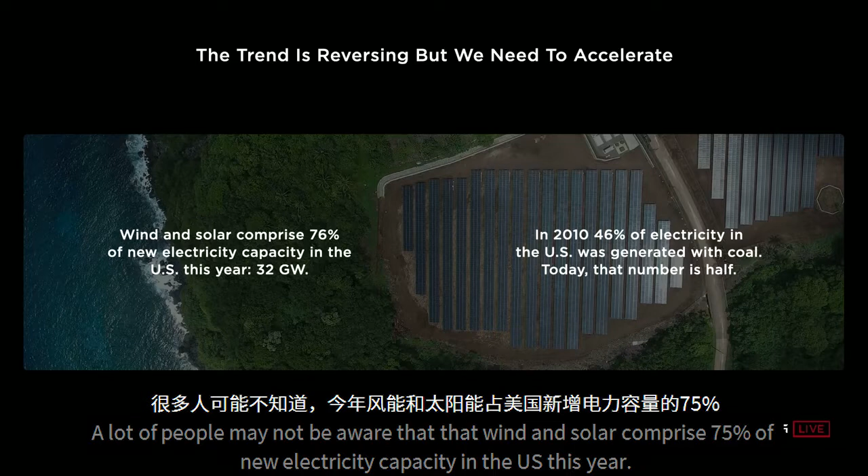There is a lot of good news, though. A lot of people may not be aware that wind and solar comprise 76% of new electricity capacity in the U.S. this year. So this is a really major thing. The grid is going sustainable very, very quickly.

It's also worth noting that the length of time that power plants last is on the order of 25 years, so even if 100% of energy generation was sustainable, it would still take 25 years to convert the grid. And in the past 10 years, power production from coal has dropped in half, from 46% of electricity in 2010 to 23% in 2020. So this is a massive improvement.

So good things are happening on a lot of levels. We just need to go faster.

In terms of Tesla's contribution, we've delivered over 1 million electric vehicles, 26 billion electric miles driven, and many gigawatt hours of stationary batteries, 17 terawatt hours of solar generated. I think solar is sometimes underweighted at Tesla, but it is a massive part of our future.

The three parts of a sustainable energy future are sustainable energy generation, storage, and electric vehicles. We intend to play a significant role in all three. So to accelerate the transition to sustainable energy, we must produce more EVs that need to be affordable, and a lot more energy storage, while building factories faster and with far less investment.

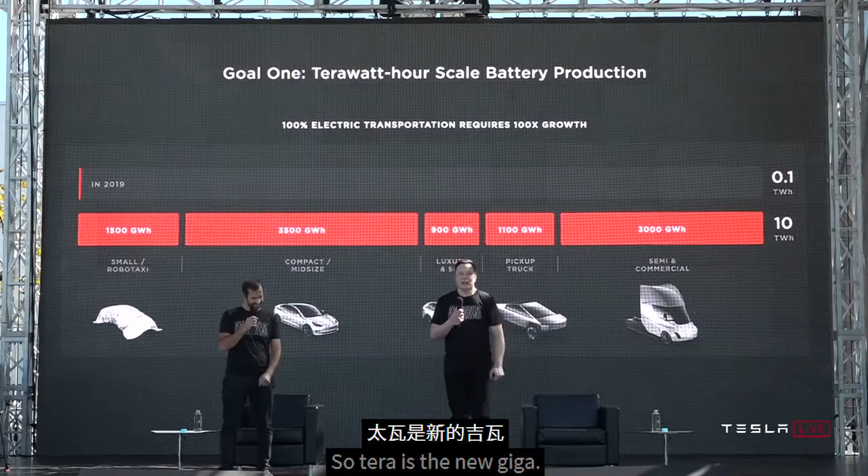So goal number one is a terawatt-hour scale battery production. Tera is the new giga, and a terawatt is 1,000 times more than a gigawatt. We used to talk in terms of gigawatts; in the future, we'll be talking in terms of terawatt hours. This is what's needed in order to transition the world to sustainability.

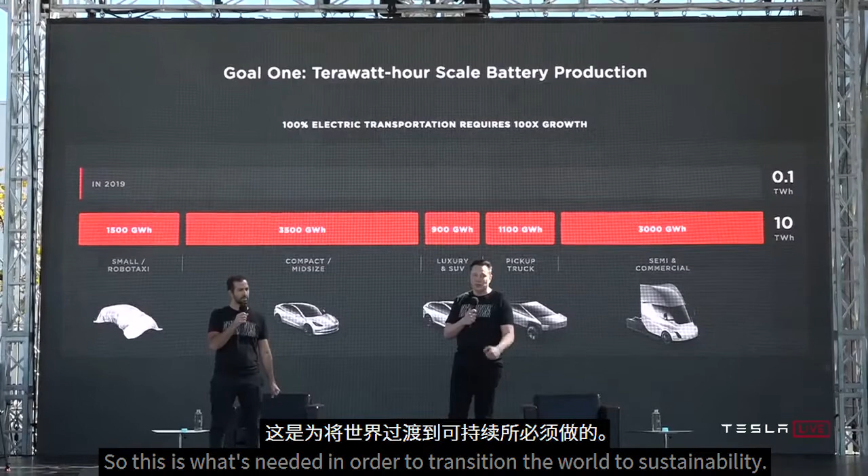You can see we're talking about 100x growth in batteries for electric vehicles to achieve this mission. And we are going to get there. It's just a matter of how fast, and our intention is to accelerate it.

You basically need on the order of roughly 10 terawatt hours a year of battery production to transition the global fleet of vehicles to electric. The average vehicle lasts 15 years, so we're talking about 150 terawatt hours, give or take, to transition all vehicles of all types to electric. So it's a lot of batteries, basically.

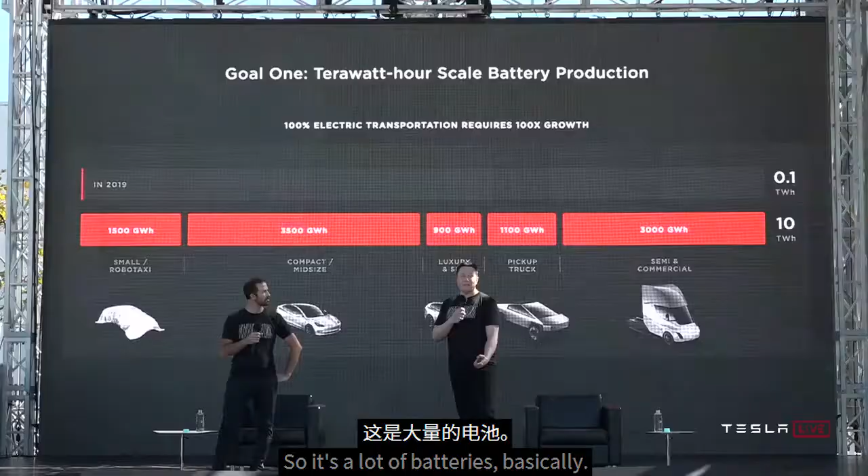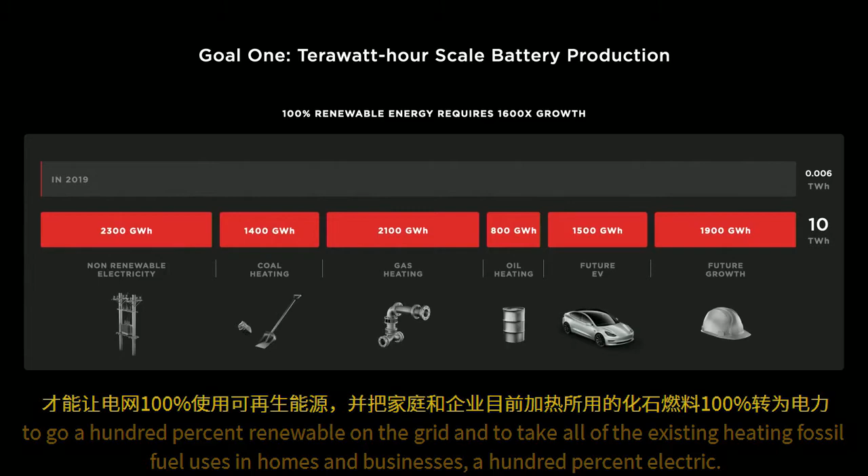And then on the grid side, we have a similar mountain to climb: 1,600 times growth from today's grid batteries to go 100% renewable on the grid and to take all of the existing heating fossil fuel uses in homes and businesses 100% electric.

And this number, I think, might grow even more, as the world economy matures and as countries with high populations industrialize, we could see this number be even more. But let's say it's roughly 20 to 25 terawatt hours per year, sustained for 15 to 25 years, to transition the world to renewable. This is a lot.

So today's batteries cannot scale fast enough. They're just too small. For Giga Nevada, 150 gigawatt hours per year is probably what we expect to make out of there, but this is really pretty small in the grand scheme of things. That's only 0.15 terawatt hours.

And it costs too much. We would need 135 fully built out Nevada gigafactories to achieve 20 terawatt hours a year. It's not scalable enough of a solution. We need a dramatic rethink of the cell manufacturing system to scale as fast as we can and should.

I think we should view this as more than just a question of money. Money is sort of like an ethereal thing, but it's really the amount of effort. You have a certain amount of effort, in terms of people and machines, and depending on how efficient that effort is, for a given amount of effort, you want the most amount of batteries. It's not just a question of like, well, if we had $2 trillion, tomorrow you could make this. It's not that easy. You actually need to organize a massive number of people, build a lot of machines, build the machines that make the machines. So it's incredibly important to have that effort yield the most number of batteries.

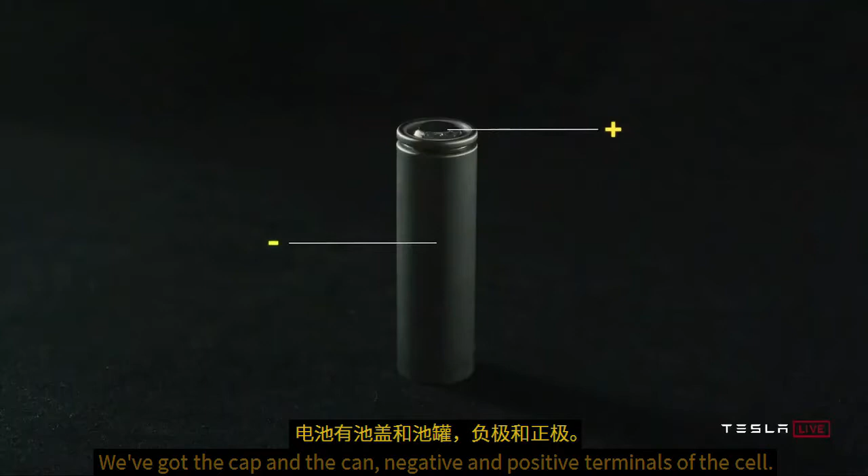We've got the cap and the can, negative and positive terminals of the cell. When you open that cell, you've got a tab connected to those terminals, what we call the jelly roll, which is the wound electrodes on the inside. You can actually see what this looks like as you unwind it. This is over 1 meter long in a typical 2170 cell. So it's quite a long winding process. And you can see the tab still there.

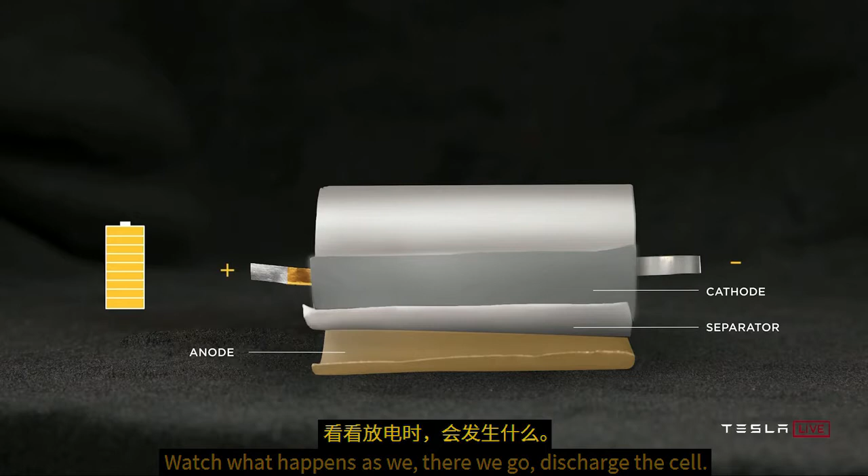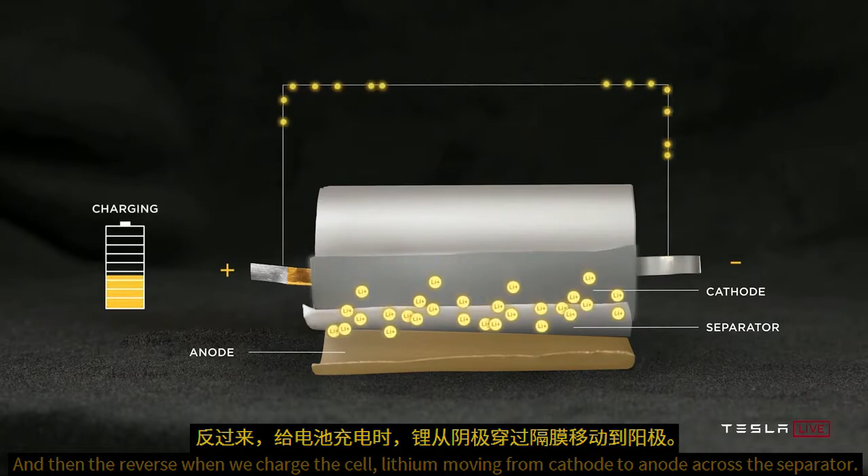And to explain what's actually going on here, we've identified we've got anode, cathode, separator, positive and negative terminal. Watch what happens as we discharge the cell: lithium moving from anode to cathode, and then the reverse. When we charge the cell, lithium moves from cathode to anode across the separator. This is the basics of what makes all lithium-ion batteries, no matter what the form factor is.

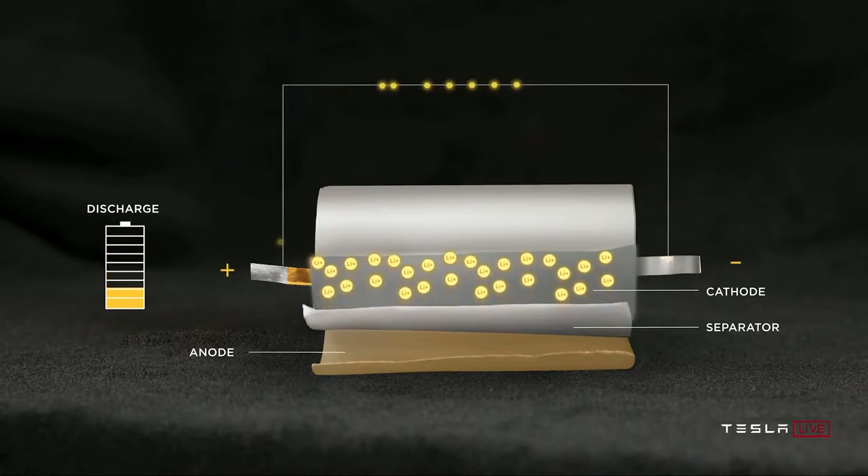And when we look at what's happened to date, at least in our products, we've moved from the 18650 form factor to the 2170 form factor through great collaboration with our partners, Panasonic, new partners like LG and CATL, and probably others in the future.

A slight note on why it's called the 18650, although not on the slide, versus the 2170: the first two digits refer to the diameter, and the second two digits refer to the length. That helps explain why these numbers seem weird. What's up with these weird numbers? But nobody could explain to me why there was an extra zero. So, okay, well, we're deleting the zero that nobody can explain in future form factors.

So technically it's like the 18650, but going forward it's the 2170, because we just got rid of the extra zero since it's pointless. This was an evolutionary step, going from 1865 to 2170, bringing 50% more energy into the cell.

But when we look to the ideal cell design, if we were to do it ourselves, we need to go beyond just what's in front of us and study the full spectrum of options. So we swept the key figures of merit, how much we can reduce cost and how much vehicle range increases as we change the outer diameter of the cell. We found a sweet spot somewhere around 46 millimeters.

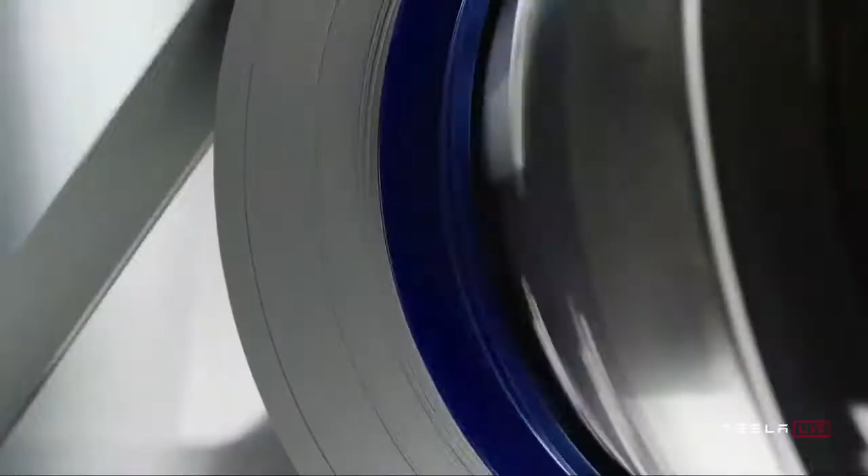It's a video of some of what's going on in the plant.

It will take about a year to reach the 10 gigawatt hour capacity. This is important to appreciate: when you build a factory, there's a certain capacity you design to, and then it takes some period of time to actually achieve that capacity. So I'd say it's probably about a year before we get to the 10 gigawatt hour annualized rate with the pilot plant, and this is just a pilot plant. The actual production plants will be more on the order of maybe 200 gigawatt hours, maybe more over time.

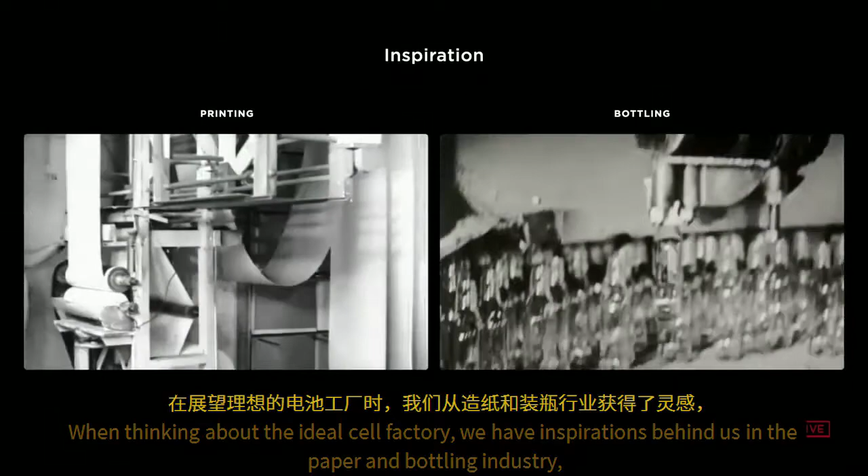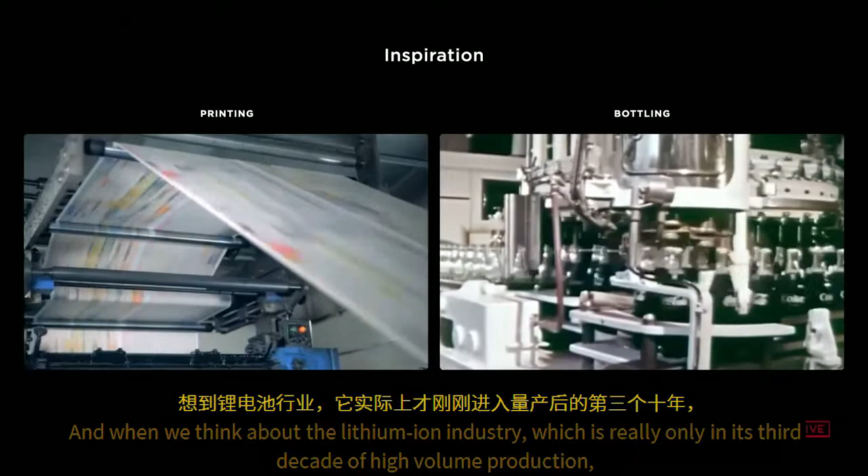When thinking about the ideal cell factory, we have inspirations from the paper and bottling industry, where from humble beginnings, over a century of innovation has enabled mass scale, continuous motion, unbelievably low manufacturing cost. And when we think about the lithium-ion industry, which is really only in its third decade of high-volume production, it has so far to go to achieve similar scale and simplicity. That was the inspiration we set out to the team as we thought about how to marry cell design and manufacturing in the best possible factory.

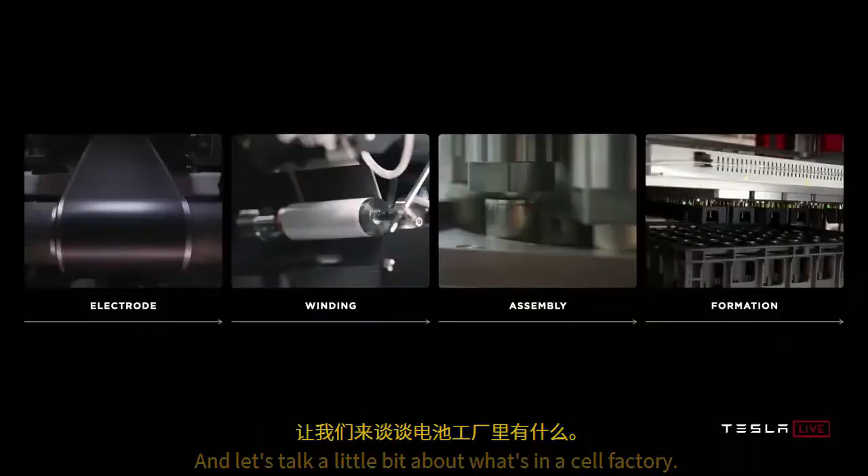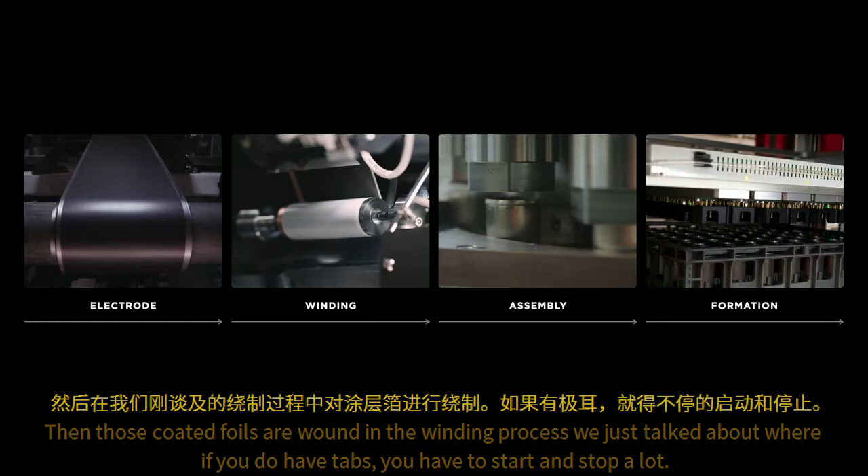Let's talk about what's in a cell factory. First, there's an electrode process where the active materials are coated into films onto foils. Then those coated foils are wound in the winding process we just talked about, where if you do have tabs, you have to start and stop a lot. Then the jelly roll is assembled into the can, sealed, filled with electrolyte, and then sent to formation, where the cell is charged for the first time, and where the electrochemistry is set and the quality of the cell is verified. We set out at every step of this process to think about how we make those processes fundamentally better and more scalable.

One of the most important processes is where it all begins, the wet process of the electrode coating. Just to give you all a sense of scale, I'm going to walk through what's in that wet process.

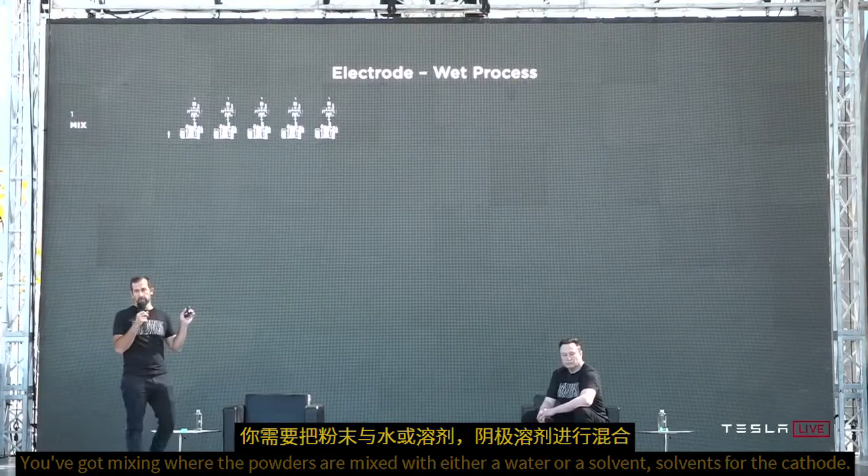You've got mixing, where the powders are mixed with either water or solvents for the cathode. That mix then goes into a large coat and dry oven, where the slurry is coated onto the foil, huge ovens, tens of meters long, dried, and that solvent then has to be recovered. You can see the solvent recovery system. Finally, the coated foil is compressed to the final density. When you're looking at this, you're like, wow, that's a lot of equipment for one step, especially when you consider that little speck next to the coating oven is a person. This is serious iron involved in making batteries.

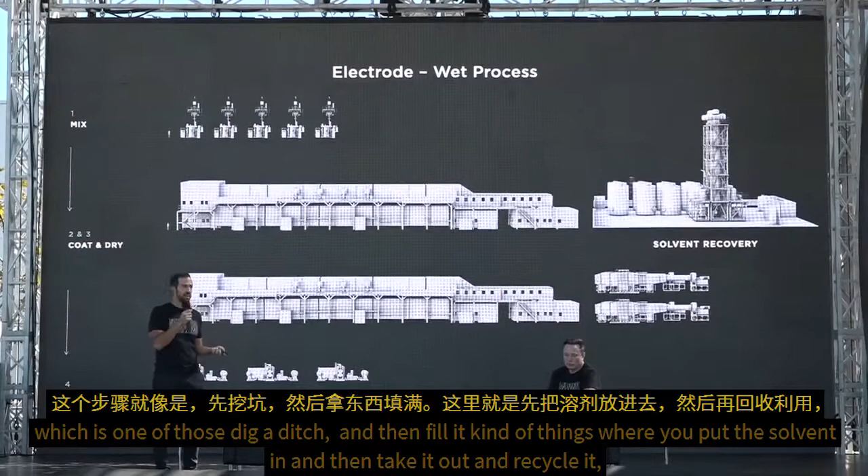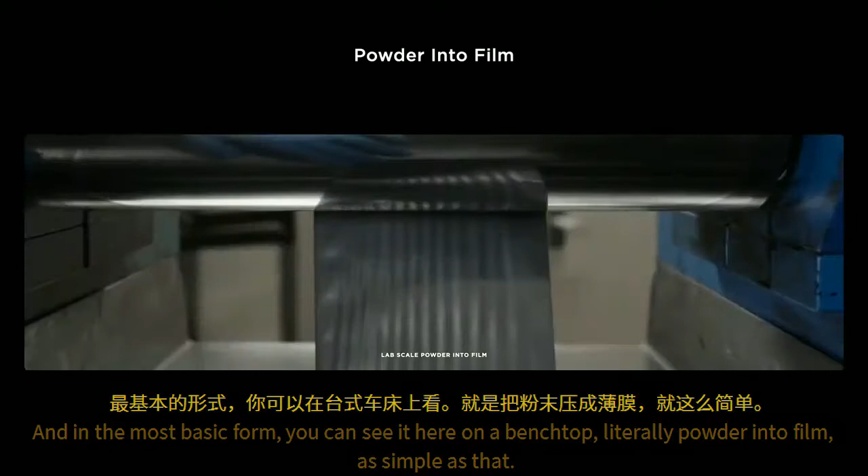Wouldn't it be great if we could skip that solvent step, which is one of those dig-a-ditch-and-then-fill-it kind of things, where you put the solvent in and then take it out and recycle it, and just go straight from dry mix to coat? That's what the dry process really is about. In its most basic form, you can see it here on a benchtop. Literally, powder into film, as simple as that.

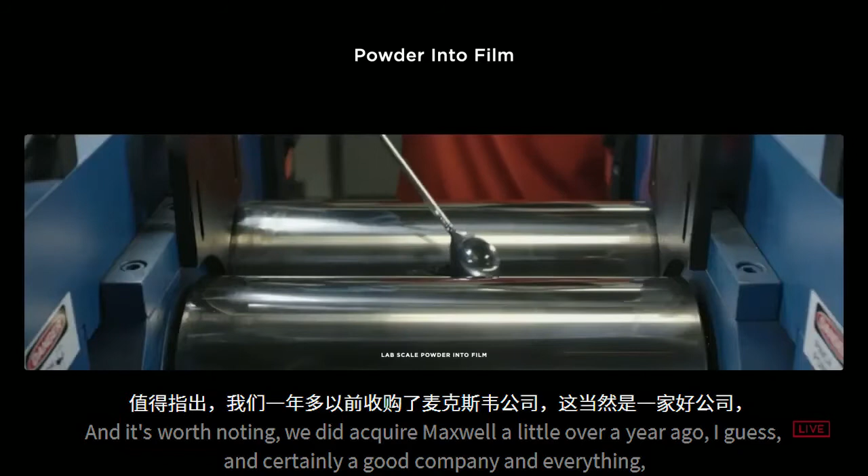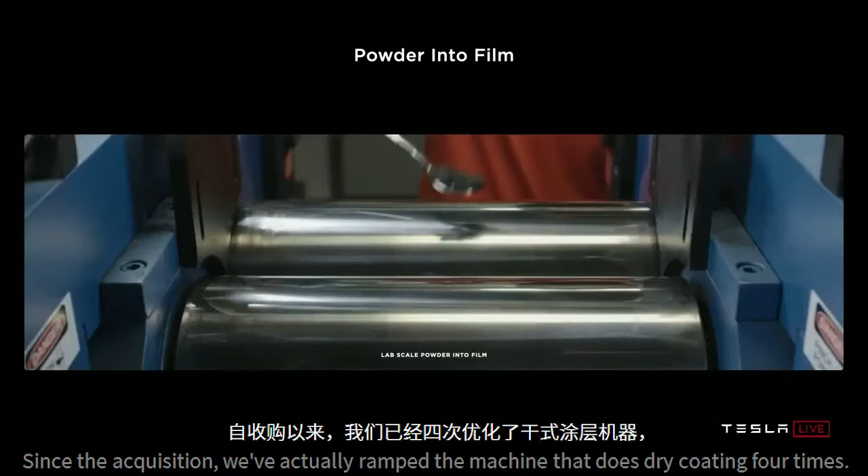I mean, it's hard, actually, to be clear. If this was easy, everyone would do it. So dry coating electrode is not actually easy, it's very hard to do what appears to be a simple thing. It's worth noting we acquired Maxwell a little over a year ago. It's certainly a good company, but the dry coating they had was sort of proof of concept. Since the acquisition, we've revved the machine that does the dry coating four times. We're on revision four post-acquisition, and there's still a lot of work to do. I would not say this is completely in the bag. As you go from benchtop to lab to pilot to volume production, there are major issues you encounter at every level. It's not like you make something work on your bench and bingo, now you can make a bazillion of it. It's insanely difficult to scale up.

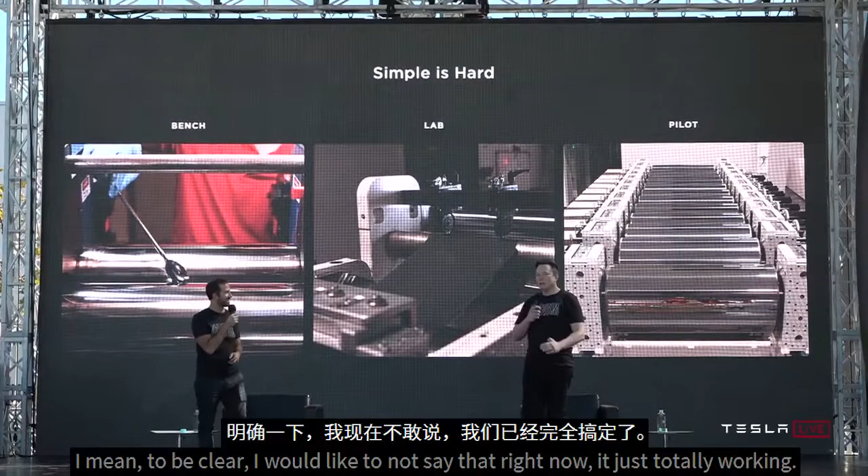But as Elon was saying, simple is hard. To be clear, I would like to not say that right now it's just totally working. It's close to working, but it's not. Even now, at the pilot plant level, it is close to working. Well, it's fair to say it does work, but with not a high yield.

We're still ironing out the kinks, but we've made tens of thousands of cells, thousands of kilometers of electrode. We are on the 4th generation of the equipment, so we've learned a lot along the way. It is super demanding because every atom has its place if you want to deliver the energy density and the cycle life and the supercharging.

But we're confident that we will get there, but it will be a lot of work along the way. There's a clear path to success, but a ton of work between here and there.

So, but this is a really profound improvement. Again, for people that know battery manufacturing, this is gigantic. We'll probably be on machine revision 6 or 7 by the time we do large-scale production. The rate at which the machines are being improved is extremely rapid. Literally every 3 or 4 months is a new rev.

And beyond the electrode, we continue to innovate on every other process step. So let's talk a little bit about assembly, which is next.

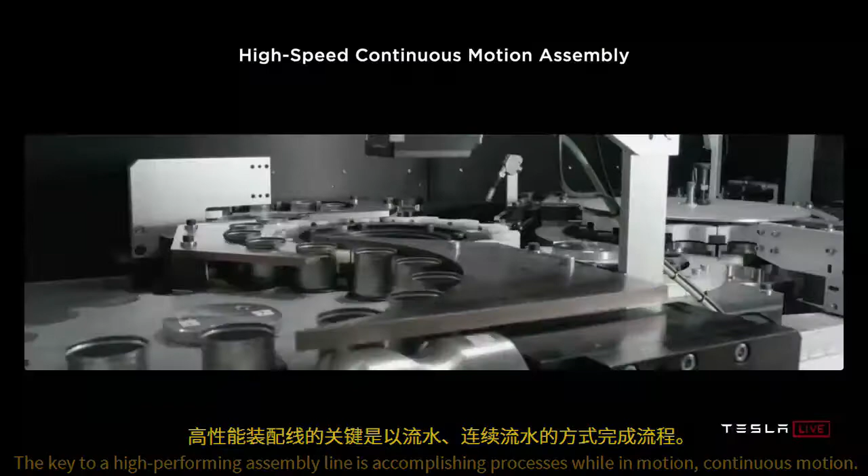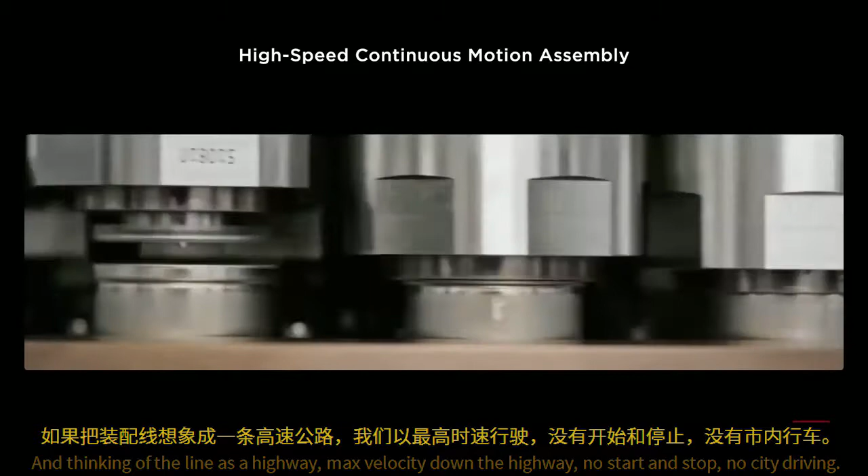The key to a high-performing assembly line is accomplishing processes while in continuous motion, thinking of the line as a highway: max velocity down the highway, no start and stop, no city driving. Exactly, no stoplights and traffic lights or anything. You want the highway. I want the highway.

Together with our internal design team that makes and designs this equipment, we coupled thinking about how to make the best cell with thinking about how to make the best equipment, so that we could accomplish the fastest parts per minute rates on all of these tools.

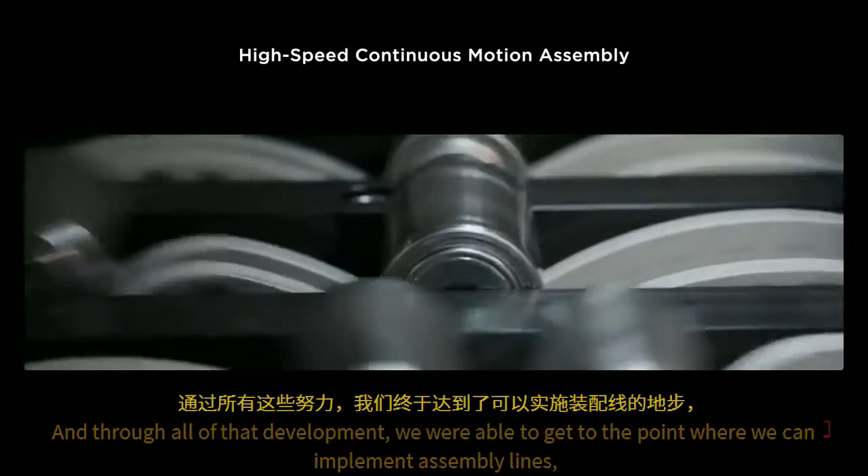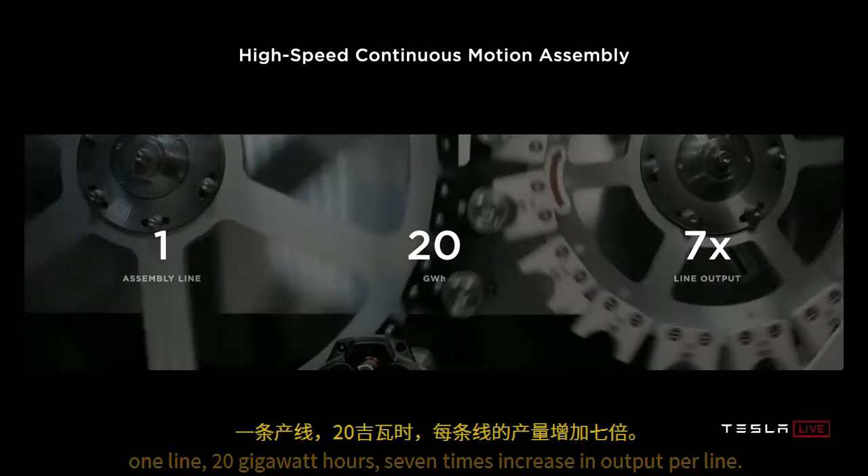And through all of that development, we were able to get to the point where we can implement assembly lines: one line, 20 gigawatt hours, a 7 times increase in output per line. When you're thinking about scalability and pure effort, having one line be 7x the capability is just effort multiplying.

You can think about the fundamental physics of a factory. I think it's actually quite a lot like the rocket equation, where you've got your exhaust velocity and then the log of the start to end masses. So it's basically saying, how fast are things going, and what percentage of the factory volume is doing useful work.

And conveyance does not count as useful work, only the value-added steps. If you break the factory down into cubic meter sections, or smaller, say one liter sections, and ask, is a majority of this volume doing useful work? You would be astounded at how bad most factories are. They're like maybe 2 or 3%, including our factory in Fremont. So I think it's possible to get to at least 10 times that volumetric efficiency, more like 30% ish, maybe more, and be 10x better, which means the factory can be 10 times smaller.

And then the other thing is, how fast are things going through the factory? It's like speed and density. The faster you go, a factory moving at twice the speed of another factory is equivalent to two factories basically, and the company that will be successful is the company that with one factory can accomplish what other companies take 2, 3, or 4 factories to do. So this is what we're trying to do here: how do we with one factory achieve what maybe 5 or even 10 factories would normally be required to achieve?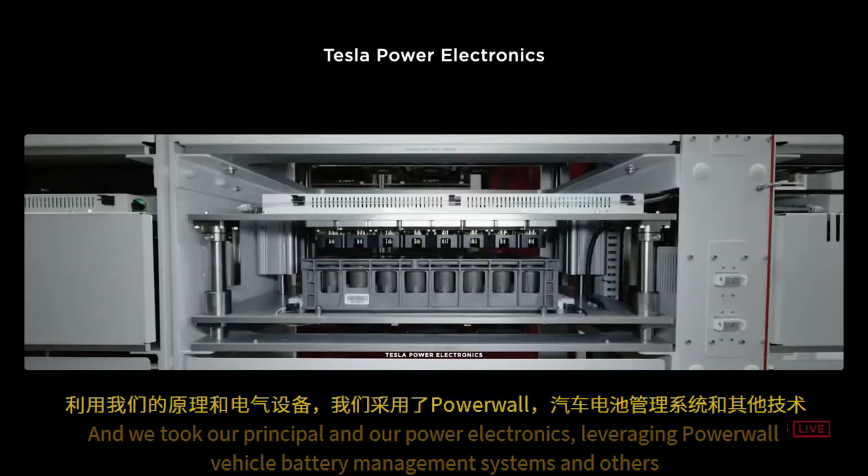In our car, we charge thousands of cells at once. And we took our principles and our power electronics, leveraging Powerwall, vehicle battery management systems, and others, to dramatically improve the formation equipment cost effectiveness and density: an 86% reduction in formation investment, 75% reduction in footprint.

So essentially what this translates to, based on what we know today, is about a 75% reduction in the investment per kilowatt hour or gigawatt hour. It's basically 4 times better than the current state of the art to the best of our knowledge. And I think there's probably room to improve even beyond that. Definitely, yeah.

We're able to, from a volume standpoint, get a smaller form factor than Giga Nevada, and get many times the cell output. So you can see, basically, we can get a terawatt hour in less space than it took to make a gigawatt hour, 150 gigawatt hours. So this is pretty profound. I would actually not have thought this was possible several years ago, that we could get to terawatt hour scale in less space than what we currently envision for doing 150 gigawatt hours.

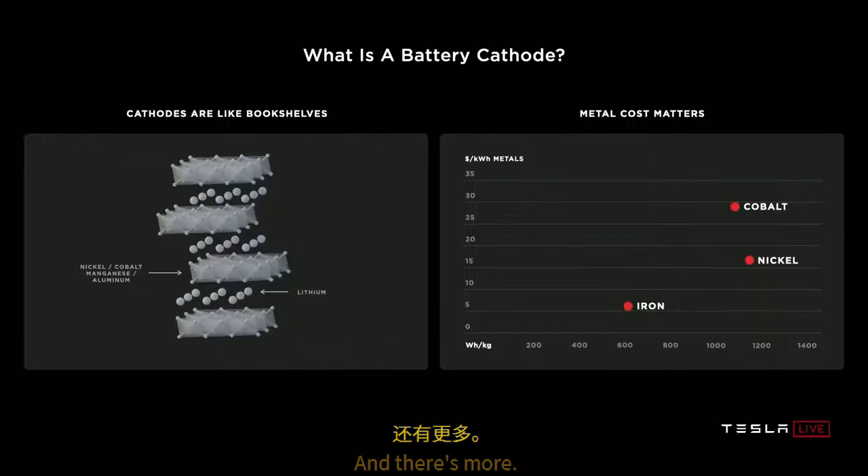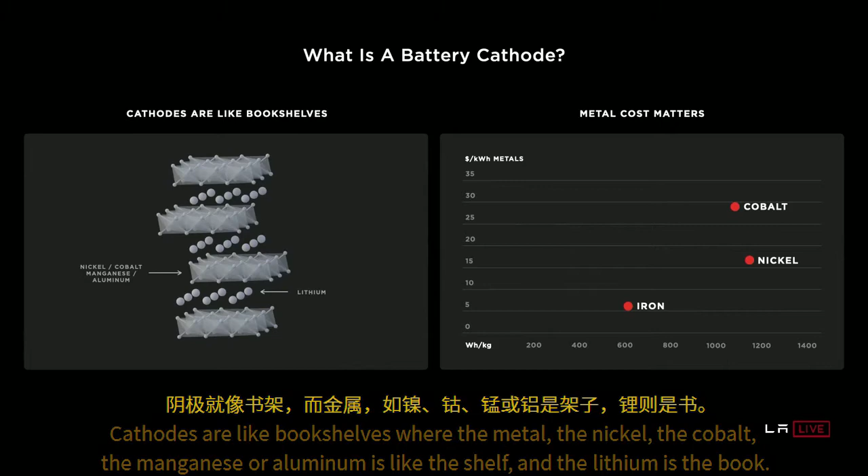Let's talk about cathodes. What is a battery cathode? Cathodes are like bookshelves, where the metal - the nickel, the cobalt, the manganese, or aluminum - is like the shelf, and the lithium is the book. And really, what sets apart these different metals is how many books of lithium they can fit on the shelves, and how sturdy the shelves are.

Cobalt is a... Yeah, sorry, I was just going to say, it's tough to figure out exactly what the right analogy is to explain cathode and anode, but a bookshelf is probably a pretty good one, in the sense that you need a stable structure to contain the ions. You want a structure that does not crumble or get gooey, that holds its shape in both the cathode and the anode. As you're moving these ions back and forth, it needs to retain its structure. If it doesn't, then you lose cycle life, and your battery capacity drops very quickly.

Absolutely, I totally agree. And I think people are always talking about like, oh, what's the cathode going to be? Is it NCA or whatever? The thing to consider is just fundamentally what the nickel, the metals, are capable of, and that's what we have on the chart here - dollar per kilowatt hour cathode of just the metal, using just LME, London Metal Exchange, prices, versus the energy density of just the cathode. You can see nickel is the cheapest and the highest energy density, and that's why increasing nickel is a goal of ours, and really everybody's, in the battery industry.

But one of the reasons cobalt is even used at all is because it is a very stable bookshelf. And the challenge with going to pure nickel is stabilizing that bookshelf with only nickel. That's what we've been working on with our high nickel cathode development, which has zero cobalt in it. Leveraging novel coatings and dopants, we can get a 15% reduction in cathode dollar per kilowatt hour. It's a big deal.

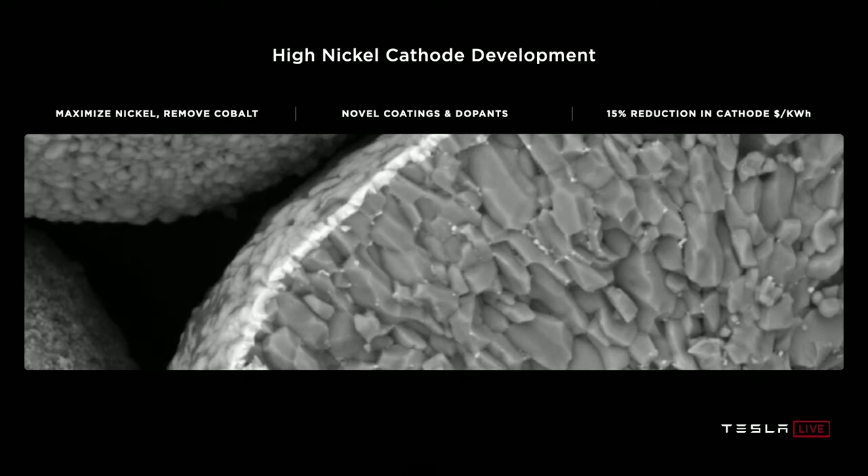But it's not just about nickel. In order to scale, we really need to make sure that we're not constrained by total nickel availability. I actually spoke with the CEOs of the biggest mining companies in the world and said, please make more nickel, it's very important. And so I think they are going to make more nickel.

But there's also, I think, a need for a kind of 3-tiered approach to batteries - starting with iron, that's like a medium range, then nickel manganese as sort of a medium-plus intermediate, and then high nickel for long range applications like Cybertruck and the semi. Something like a semi truck, it's extremely important to have high energy density in order to get long range.

Just to give iron a bit more time - although if you look at the watt-hours per kilogram at the cathode level, it looks like nickel's twice as good, when you fully consider it at the pack level, everything else taken into account, nickel is about maybe 50 or 60% better than iron. So iron is a little better than it would seem when you look at it at the pack level, fully considered.

It's not as good as nickel. Nickel is like 50 to 60% better, but it's actually pretty good. So, good for stationary storage and for medium range applications where energy density is not paramount.

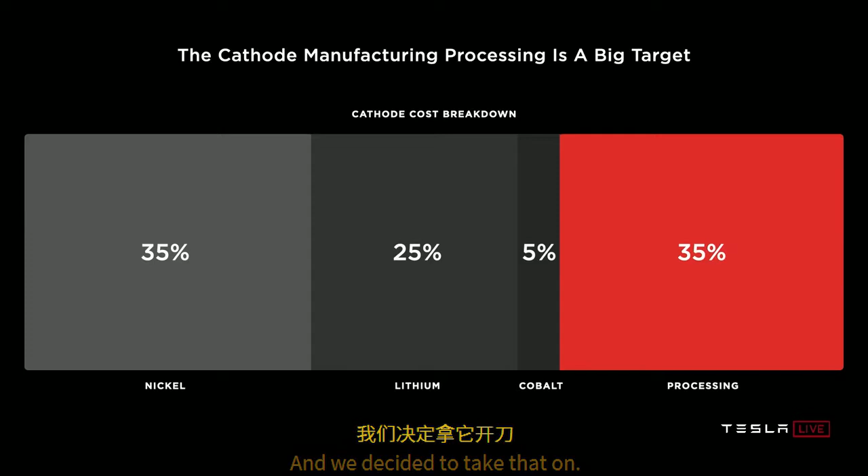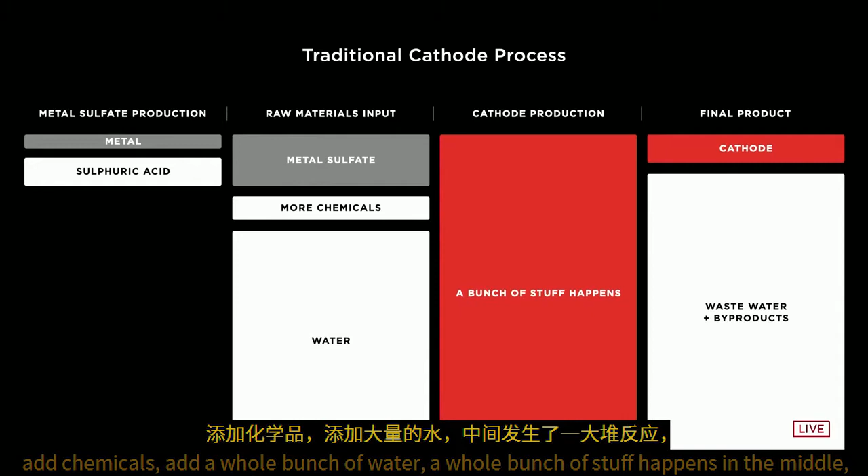Here's a view of the traditional cathode process. Effectively, if you start at the left and you have the metal from the mine, the first thing that happens is the metal from the mine is changed into an intermediate thing called a metal sulfate, because that's just happened to be what chemists wanted a long time ago. And then when you're making the cathode, you have to take this intermediate thing called metal sulfate, add chemicals, add a whole bunch of water, a whole bunch of stuff happens in the middle, and at the end, you get that little bit of cathode and a whole bunch of wastewater and byproducts.

Yeah, it's insanely complicated. If you look at the total journey, like it's a small world journey of 'I am a nickel atom, what happens to me?' And it's crazy - like you're going around the world 3 times. There's the moral equivalent of digging the ditch, filling the ditch, and digging the ditch again. It's total madness, basically. These things just grew up as legacy things - it's how it was done before, and then they connected the dots, but really didn't think of the whole thing from a first principle standpoint, saying how do we get from the nickel ore in the ground to the finished nickel product for a battery.

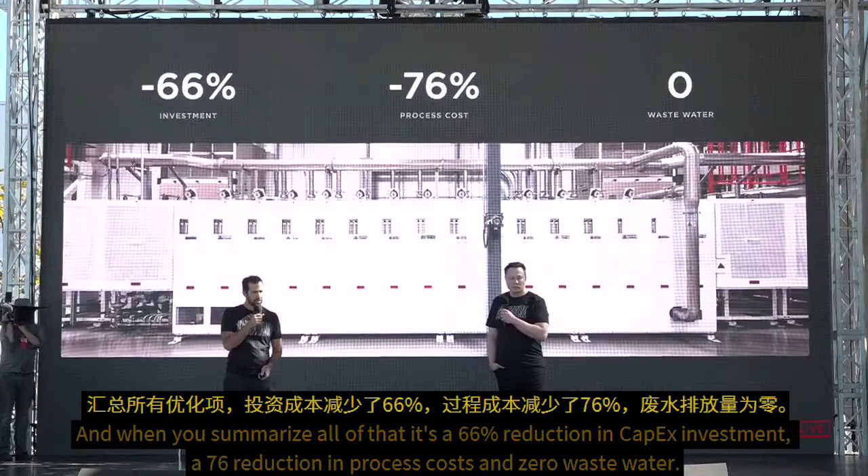And so we've looked at the entire value chain and said, how can we make this as simple as possible? And that's what we're proposing here with our process. As you can see, a whole lot less is going on here. We get rid of the intermediate metal, water, final product cathode, recirculate the water - no wastewater at all. And when you summarize all of that, it's a 66% reduction in CapEx investment, a 76% reduction in process cost, and 0 wastewater. Much more scalable solution.

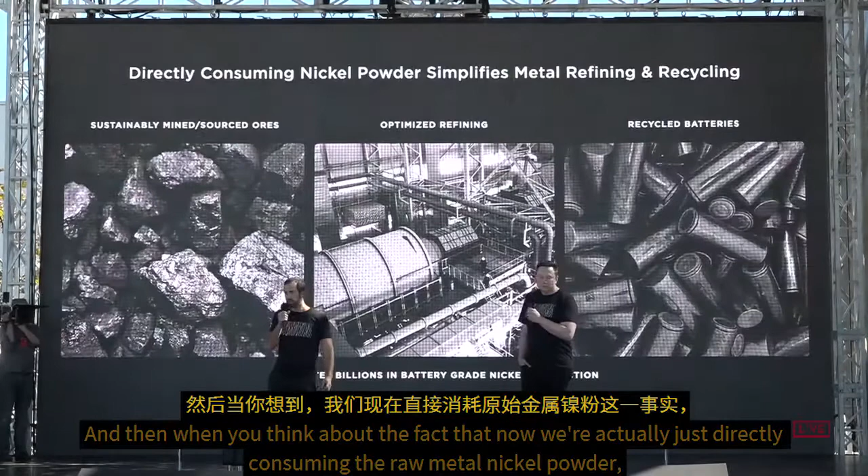And then when you think about the fact that now we're actually just directly consuming the raw metal nickel powder, it dramatically simplifies the metal refining part of the whole process. So we can eliminate billions in battery-grade nickel intermediate production. It's not needed at all.

And we can also use that same process we showed on the previous page to directly consume the metal powder coming out of recycled electric vehicle and grid storage batteries. So this process enables both simpler mining and simpler recycling.

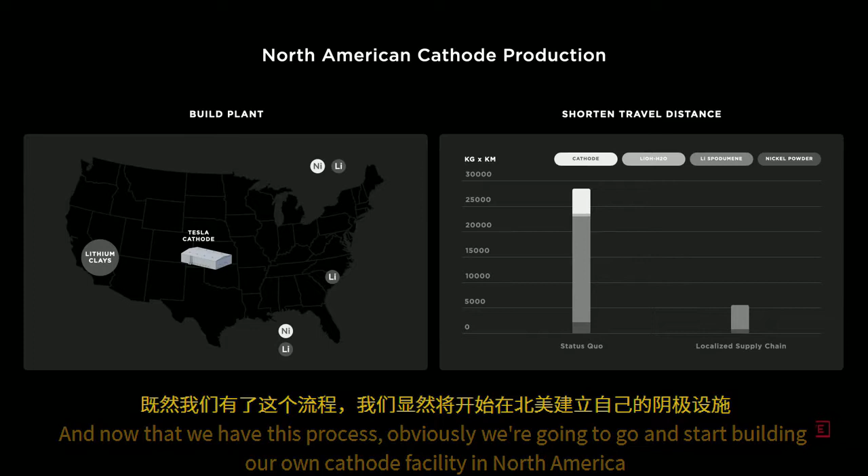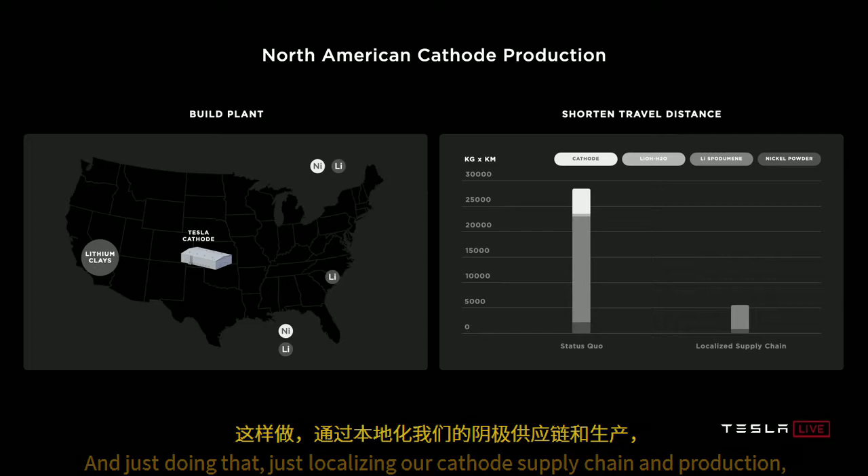And now that we have this process, obviously we're going to go and start building our own cathode facility in North America and leveraging all of the North American resources that exist for nickel and lithium. And just doing that, just localizing our cathode supply chain and production, we can reduce miles traveled by all the materials that end up in the cathode by 80%, which is huge for cost.

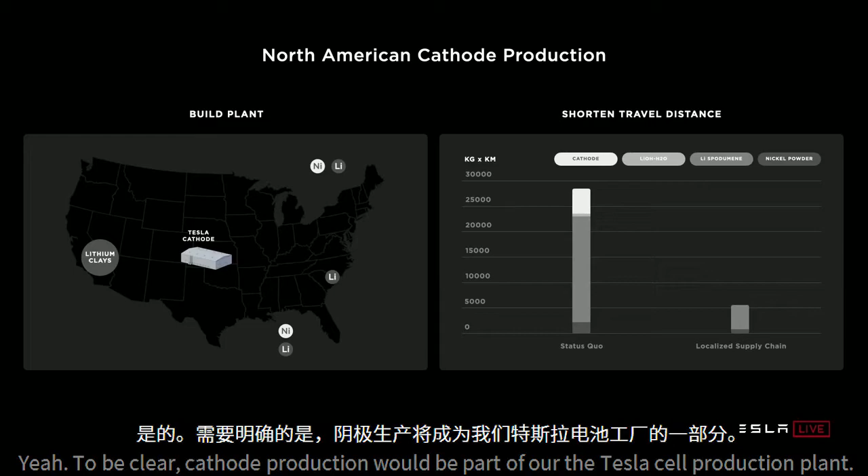To be clear, cathode production would be part of the Tesla cell production plant. So it would just be, basically, raw materials coming from the mine, and from raw materials in the mine, out comes a battery. And on that note, the way the lithium ends up in the cell is through the cathode. So then we should obviously do on-site lithium conversion as well, which is what we will do using a new process that we're going to pioneer. That's a sulfate-free process again, skip the intermediate. 33% reduction in lithium cost, 100% electric facility co-located with the cathode plant.

So it's important to note that there is a massive amount of lithium on Earth. Lithium is not like oil—there's a massive amount of it pretty much everywhere. In fact, there's enough lithium in the United States to convert the entire United States fleet to electric, all 300 million or so vehicles, using only lithium that is already discovered and known to exist in the United States.

People really haven't even been looking, because it's just so widely available. But it is important to ask what is the smartest way to take the ore and extract the lithium, and do so in an environmentally friendly way. Looking at this from a first principles physics standpoint, instead of just the way it's always been done, we found that we can actually use table salt, sodium chloride, to basically extract the lithium from the ore.

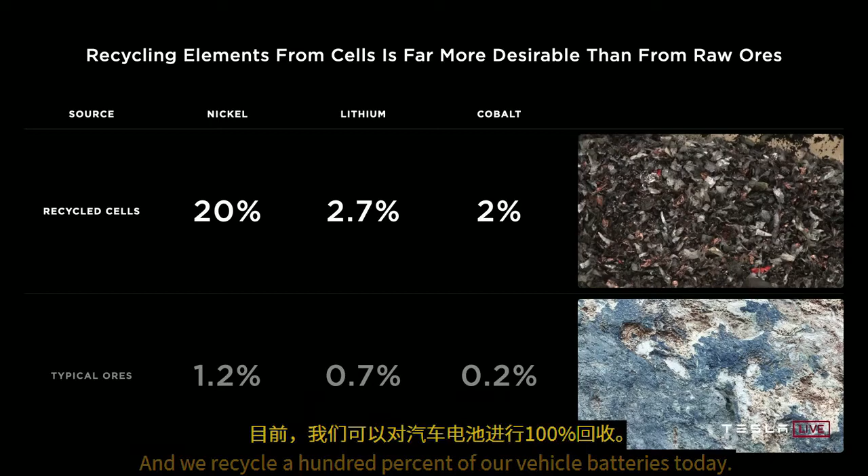We recycle 100% of our vehicle batteries today, and we are starting our pilot full-scale recycling production at Gigafactory Reno next quarter to continue developing this process as our recycling returns grow. To date it's been done by third parties, but we think we can recycle the batteries more effectively, especially since we know our own batteries—we're making the same battery as the thing we're recycling—whereas third-party recyclers have to consider batteries of all kinds.

Just to think about what this actually means: the recycling resource is always 10 or more years delayed, because batteries last a really long time. But eventually it is the way that all resources will be made available, and that's why we're investing in this recycling facility in Nevada. Long-term, new batteries will come from old batteries once the fleet reaches steady state.

So we just talked about scaling cathode and recycling. All of the benefits we just saw are added to this benefit of a 12% reduction in dollars per kilowatt hour at the battery pack level—almost at our goal to halve the cost. But there's one more section. Take it away, Elon.

There's an architecture that we've been wanting to do at Tesla for a long time, and we finally figured it out. I think it's the way that all electric cars in the future will ultimately be made—it's the right way to do things.

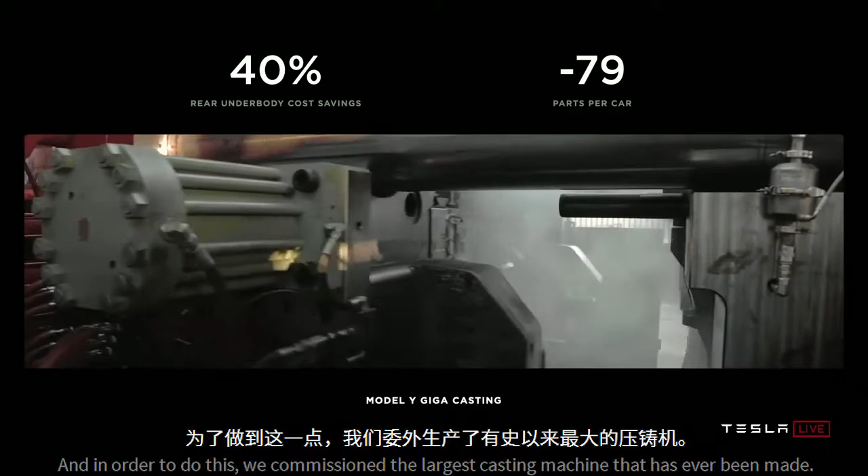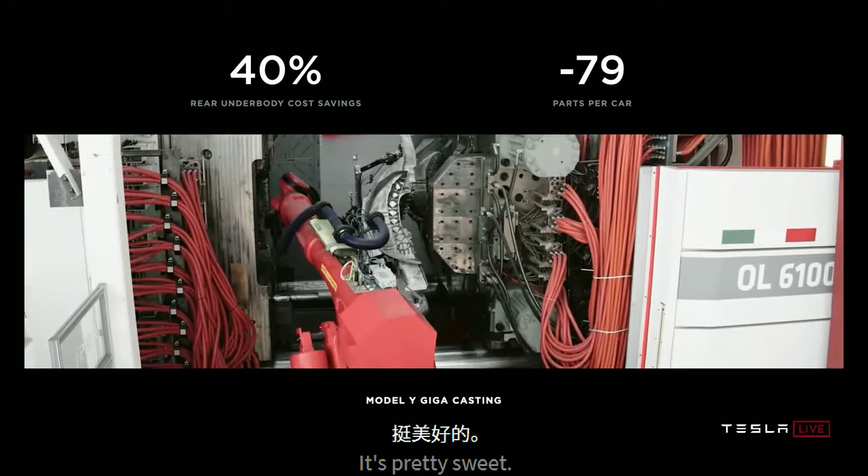It starts with having a single piece casting for the front body and the rear body. In order to do this, we commissioned the largest casting machine that has ever been made, and it's currently working just over the road at our Fremont plant. It's pretty sweet—currently making the entire rear section of the car as a single piece, high pressure die cast aluminum.

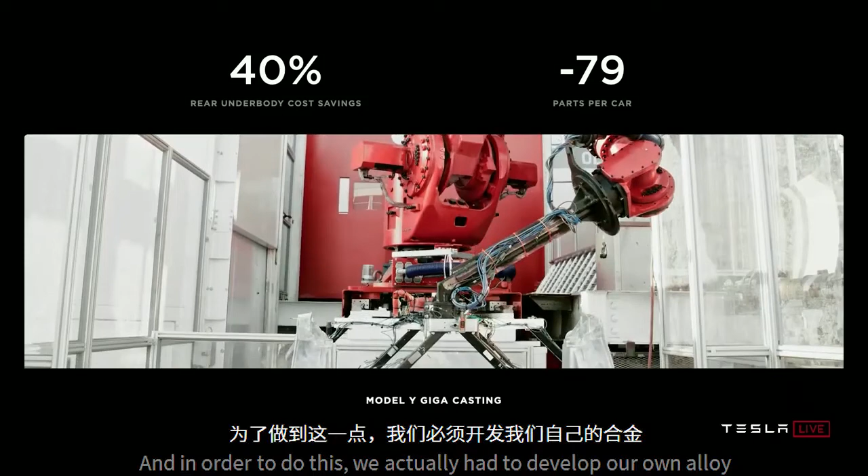In order to do this, we actually had to develop our own alloy, because we wanted a high strength casting alloy that did not require coatings or heat treatment. This is a big deal for castings, especially large castings—if you heat treat it afterwards, it tends to deform, kind of doing this potato chip thing, so it's very hard to keep a large casting holding its shape. To achieve this, there was no alloy that existed that could do this.

So we developed our own alloy, a special alloy of aluminum that has high strength without heat treat and is very castable. That's a great achievement of our materials team. In fact, we've got a lot of advanced materials coming for Tesla, new alloys and materials that have never existed before.

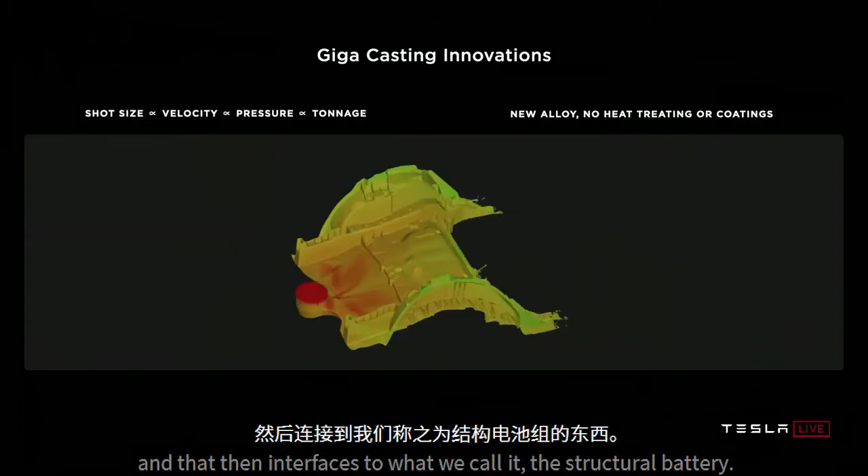So you're basically making the front and rear of the car as a single piece, and then that interfaces to what we call the structural battery, where the battery for the first time will have dual use. The battery will both have the use as an energy device and as structure.

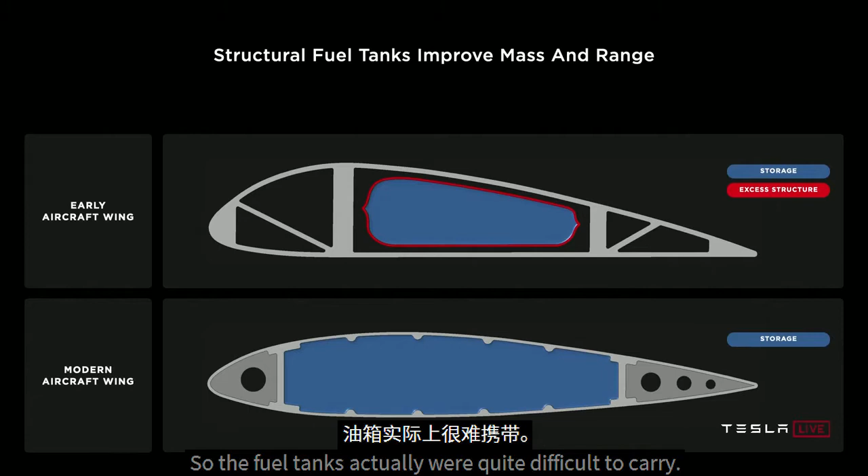This is absolutely the way things are done. In the early days of aircraft, they would carry the fuel tanks as cargo. The fuel tanks were actually quite difficult to carry, basically worse than cargo. You had to kind of bolt them down. It was very difficult. Then somebody said, 'What if we just make the wing tanks, make the fuel tank in wing shape?' So all modern airplanes, your wing is just a fuel tank in wing shape. This is absolutely the way to do it. The fuel tank serves as dual structure, and it's no longer cargo. It's fundamental to the structure of the aircraft. This was a major breakthrough.

We're doing the same for cars. So this is really quite profound.

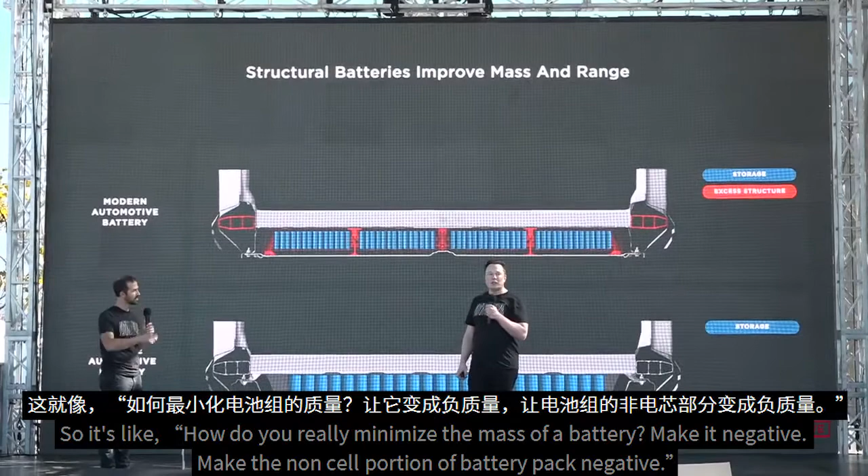Effectively, the non-cell portion of the battery has negative mass. We save more mass in the rest of the vehicle than the non-cell portion of the battery. So how do you really minimize the mass of a battery? Make it negative. Make the non-cell portion of the battery pack negative.

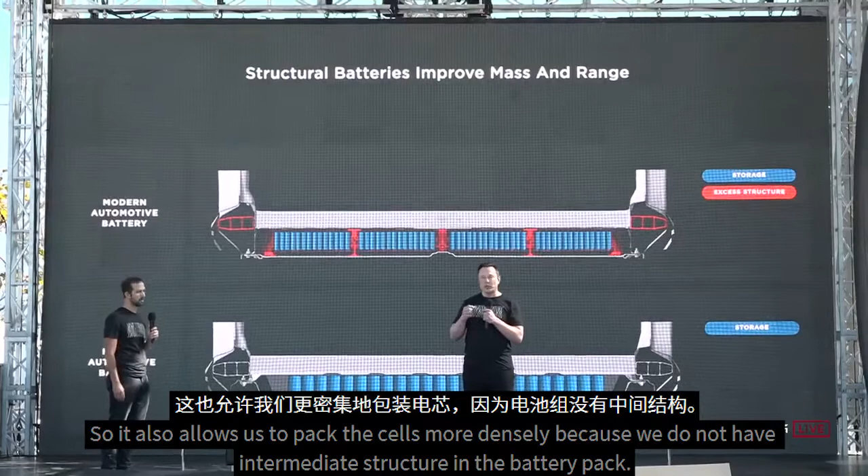It also allows us to pack the cells more densely because we do not have intermediate structure in the battery pack. Instead of having supports and stabilizers and stringers and structural elements in the battery, we now have a lot more space because the pack itself is structural.

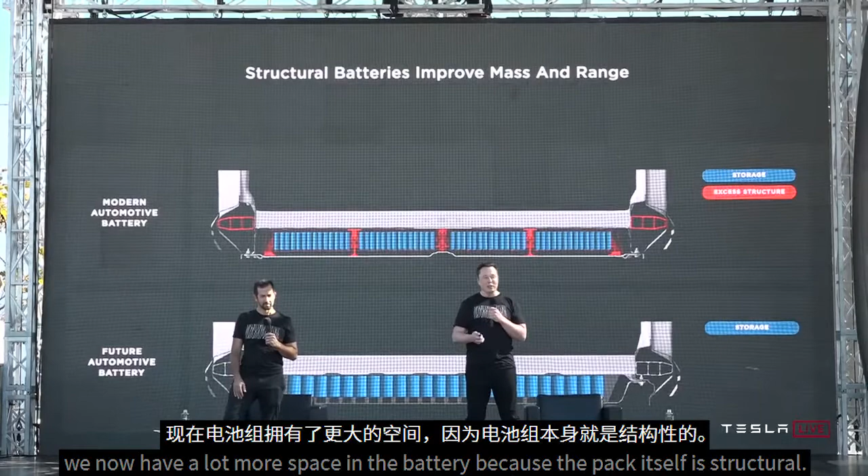And what we do is, instead of having just a filler that is a flame retardant, which is currently what is in the 3 and Y battery packs, we have a filler that is a structural adhesive as well as flame retardant. So it effectively glues the cells to the top and bottom sheet, and this allows you to do shear transfer between the upper and lower sheet.

Just like if you have a Formula One car or a racing boat with carbon fiber face sheets and, say, aluminum honeycomb between them, this gives you incredible stiffness. It's really the way any super fast thing works, you create basically a honeycomb sandwich with two face sheets. This is actually even better than what aircraft do, because aircraft can't do this, since fuel is liquid.

In our case, the batteries are solid, so we can actually use the steel shell case of the battery to transfer shear from the upper and lower face sheet, which makes for an incredibly stiff structure, even stiffer than a regular car. In fact, if this was like a convertible with no upper structure, it would be stiffer than a regular car. This is really major.

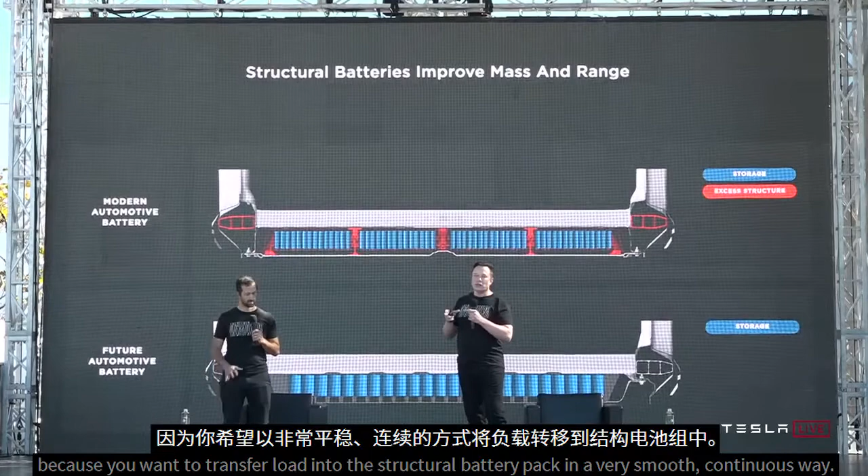So it improves the mass efficiency of the battery, and those castings are also quite important because you want to transfer load into the structural battery pack in a very smooth, continuous way, so you don't put arbitrary point loads into the battery. You want to feather the load out from the front and rear into the structural battery.

It also allows us to move the cells closer to the center of the car, because we don't have all the supports and stuff. So the volumetric efficiency of the structural pack is much better than a non-structural pack, and we bring the cells closer to the center. Because they're closer to the center, it reduces the probability of a side impact potentially contacting the cells, since any side impact has to go further in to reach the cells.

It also improves what's called the polar moment of inertia, like when there's an ice skater with arms out or arms in. Arms in, you rotate faster. So if you can bring things closer to the center, you reduce the polar moment of inertia, and that means the car maneuvers better. It just feels better. You don't know why, but it just feels more agile. This is really major.

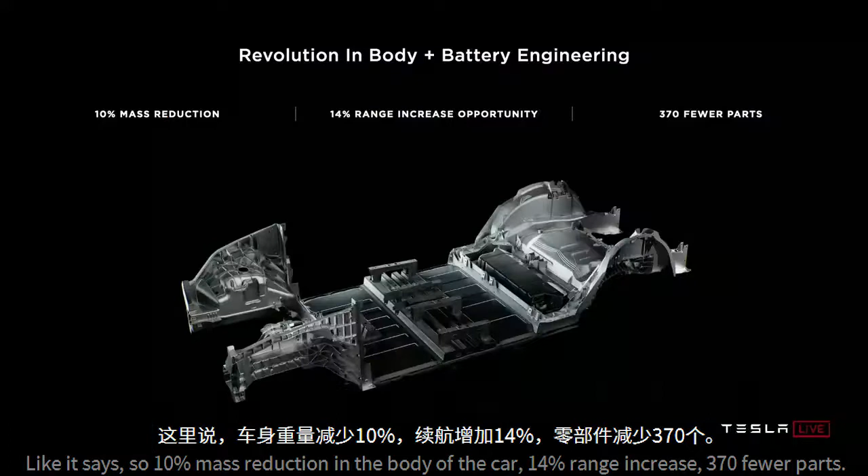Like it says, 10% mass reduction in the body of the car, 14% range increase, and 370 fewer parts.

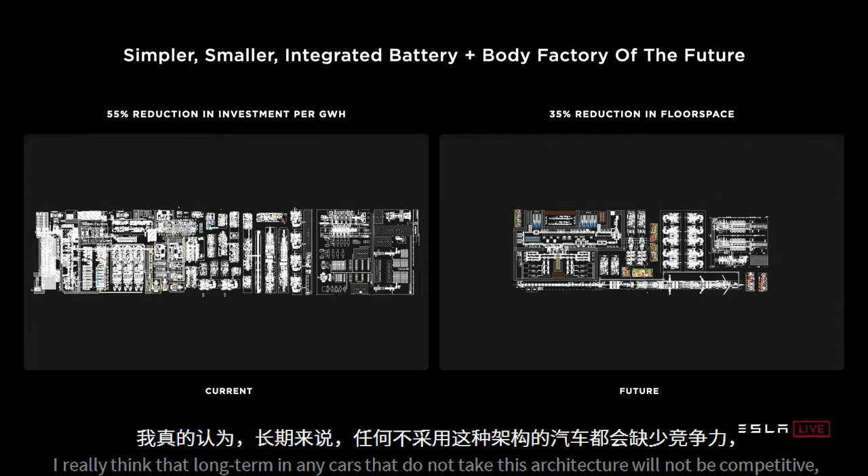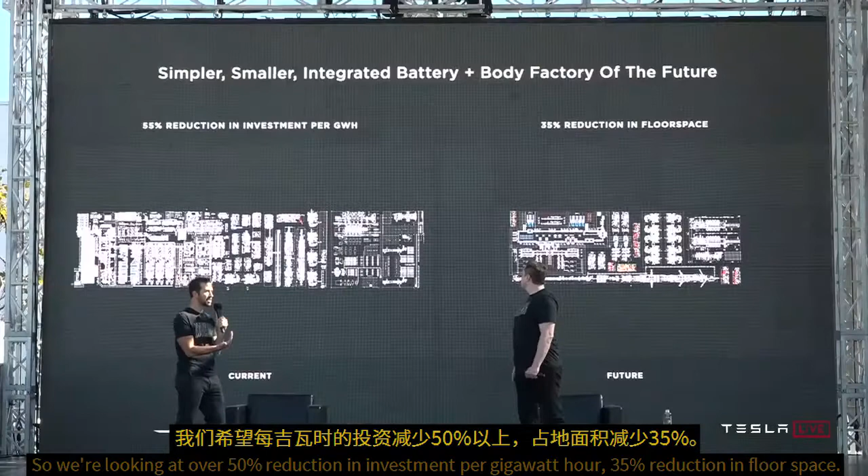I really think that long term, any cars that do not take this architecture will not be competitive. And it's not just at the product level a better product, but in the factory it's a massive simplification. You saw the part removal, the casting machines, the structural battery pack. So we're looking at over 50% reduction in investment per gigawatt hour, 35% reduction in floor space, and we'll continue to improve that as we make the vehicle factory of the future.

So it's major improvements on all fronts, from the cell all the way to the vehicle. In addition to the improvements on enabling additional range and improving the structural performance of the vehicle, it's worth another 7% dollar per kilowatt hour reduction at the battery pack level, bringing our total reductions now to 56% dollars per kilowatt hour.